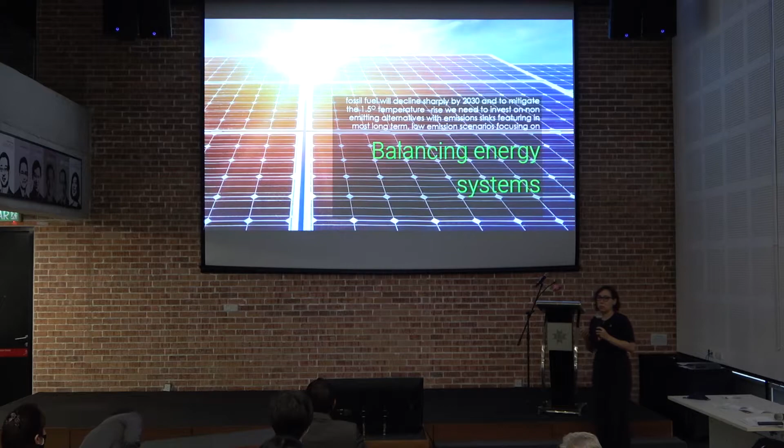Dubai Expo has this theme, and that is connecting minds and creating the future through opportunity, mobility, and sustainability. That was the theme given for the Dubai Expo in 2019 when we participated in the competition. Malaysia Pavilion theme statement from MGTC, from the government, was energizing today, tomorrow, harmony and business. And our theme was to connect all that through the synergy with nature, to connect the Expo's theme as well as MGTC's theme to the pavilion concept of synergy with nature. And what you're seeing is the exact presentation we presented when we gave the ideas for the theme.

One is balancing our energy systems, where we saw the future is about balancing our energy systems. It's about addressing this issue that Malaysia was always being criticized for, which is the deforestation, and that we actually are doing restoration for our forests. And we also have a cap to the minimum amount of forest that we are maintaining. It's about balancing sustainable plantation. We had a lot of criticism at the time we were doing the competition about palm plantation. And so the building had to talk about sustainable plantation, which you will see in the themes inside the exhibition.

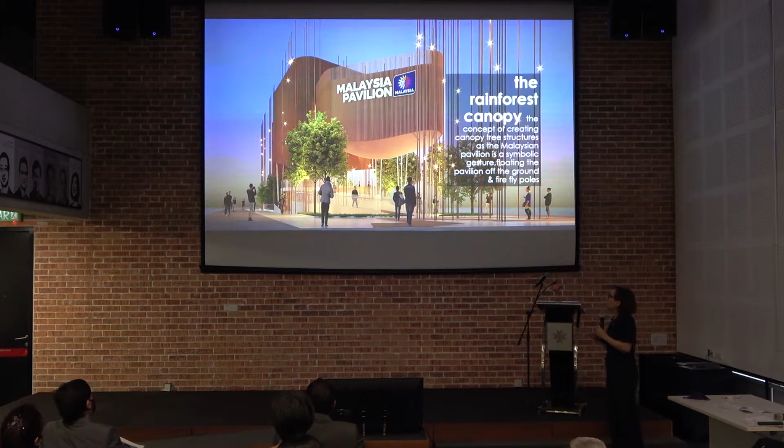And the concept of touching the ground lightly was taking something of our Malaysian tradition of building on stilts and building with timber. So this was the concept that drove our design. And the idea of being something a bit more playful, in the canopy of trees, this idea that you're doing exploration as you're walking through and jumping from one canopy to the other, was also something that we thought would bring delight to the experience in the building. And this was the idea for the rainforest canopy, that we elevate the entire building.

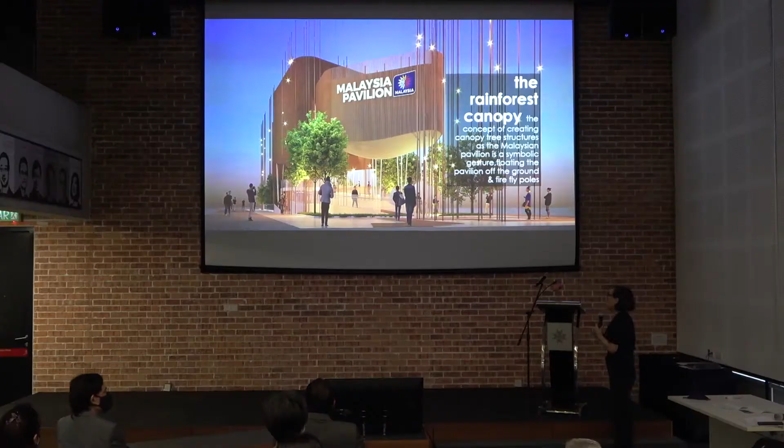Touching the ground lightly was not just that we lifted it off the ground, but the impact of this building, which then became the first net zero carbon building for the entire Expo. Despite being the smallest pavilion, it had the loudest voice to speak about approaching net zero, which has become a real theme for these last 2 years in the pandemic; almost every talk that you attend is talking about net zero. Everyone's talking about sustainable nature-based design, but we were already talking about it, and we wanted Malaysia to represent that and become an inspiration for Malaysia, but also globally.

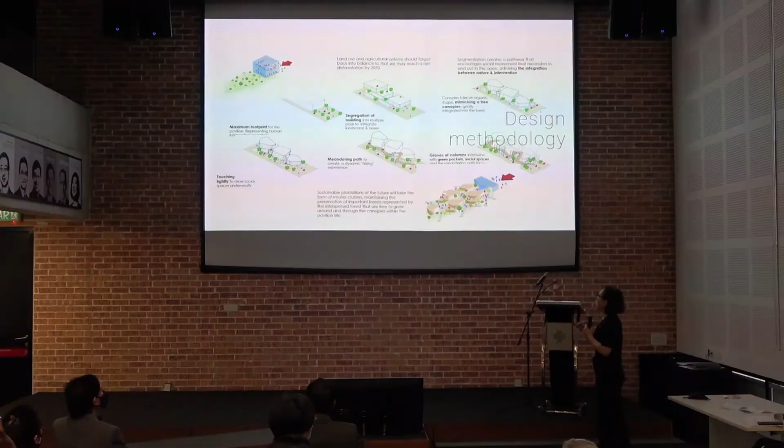In terms of the design methodology, usually what you see in exhibition buildings is one contained building and the experience of the black box going inside that exhibition. We wanted to change that. We talked about stacking, we talked about landscape, we talked about mimicking a tree canopy. And so you can see the evolution of how the design started to take its place in the formation of the building itself. And in the end, what you see is something that's fairly organic, with as many trees as can be covered in between it.

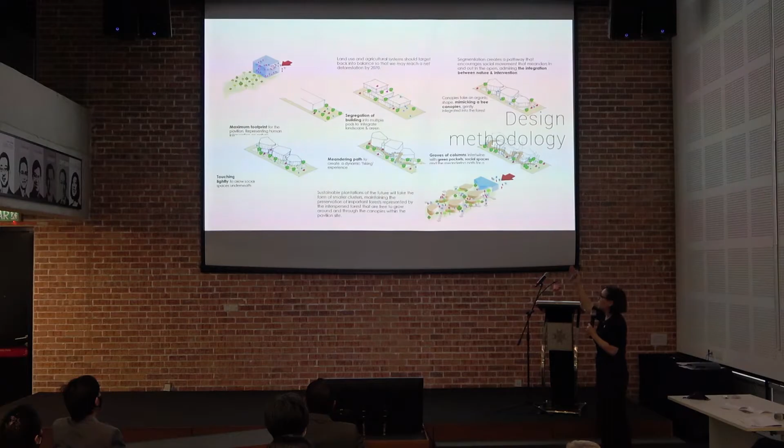But you see this meandering experience to get up there. There's always this huge line to get into Expo, and we wanted that entire experience to be part of the experience of going into the building. And this idea of a meandering river path to experience going into the pavilion is that you're meandering up the ramp and into the building itself as part of the experience.

So in terms of a spatial flow, we had to consider exhibition flow. It's incredible when you're doing one of these expos because the brief that comes to you from Expo is about this thick. It covers every element of sustainability. I think this is the first Expo that required that every pavilion had to report about the sustainability of their buildings.

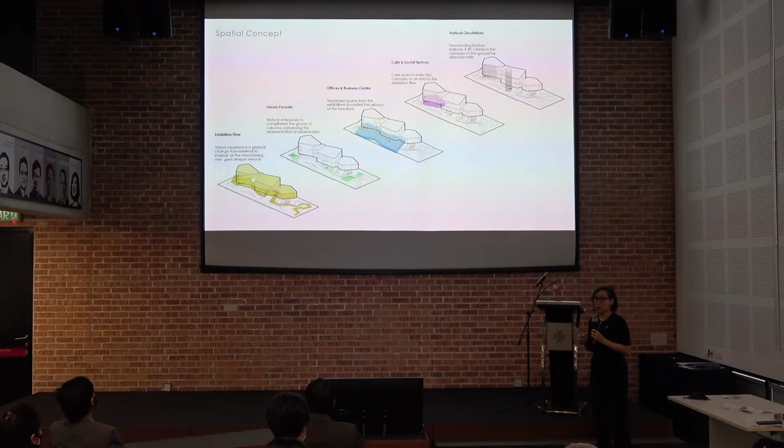This is the meandering experience that you go up. Right at the front there, we have a water collection pond, a biofield right in front, and then you enter and you ramp up and experience through what you often see when you go into the Instagram of the Expo. Malaysia is that they use this amphitheater, which is open to the public. So they have a lot of shows.

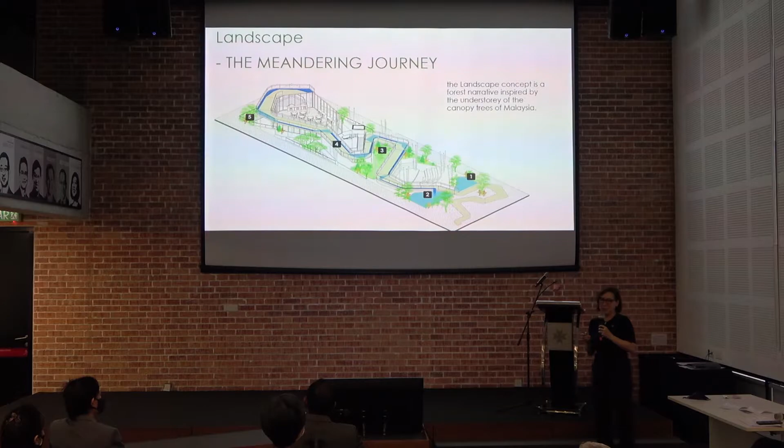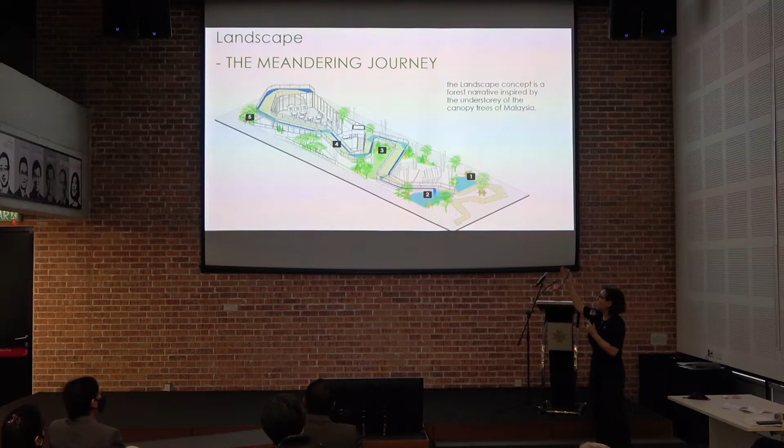Currently, they have about 820,000 people that have come to this tiny little pavilion itself. And they're aiming and they hope that they will reach 1 million by the end of March, which is incredible when you see the small exhibition spaces that you actually have to go into the space itself. So you'll meander through a garden, water feature, amphitheater, and all the way up past the cafeteria and public space and enter really from the rear of the building.

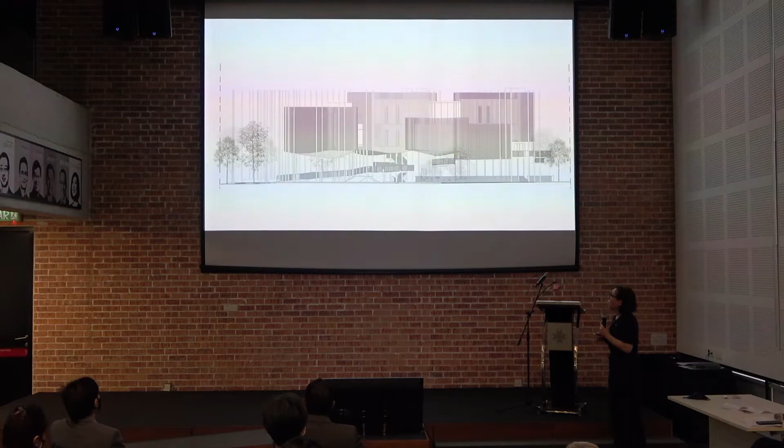The idea of using timber was also to do with carbon, and we'll talk a little bit about that later on. But as you can see, we just wanted to give something that was very, very light. Meranti timber is what we use for the timber, PEFC rated, of course, and that was the only element we brought from Malaysia. Everything else we actually built in Dubai itself.

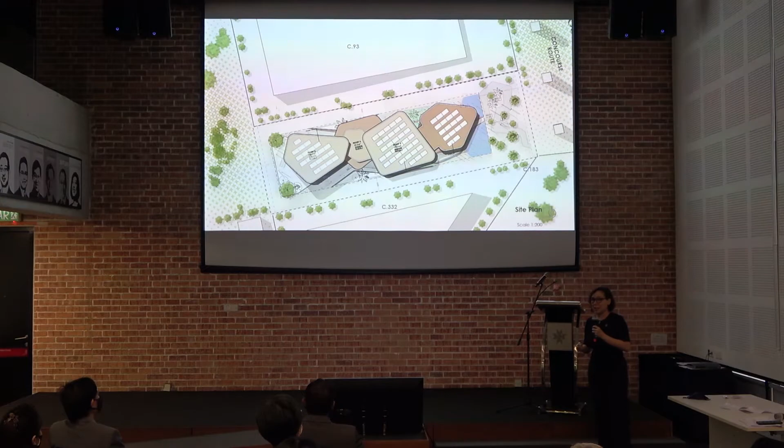This is the tiny site. It's very, very long. So trying to create an experience from the journey, from the time you enter and the journey into the whole experience is rather important. We had hoped that we actually, and we've told MGTC the next time that you get a site, please try and make sure you got a much bigger frontage. But a very narrow site is an interesting thing about how do you create an impact when you enter into the pavilion. This was our first perspective, and then you'll see what the finish actually looks like.

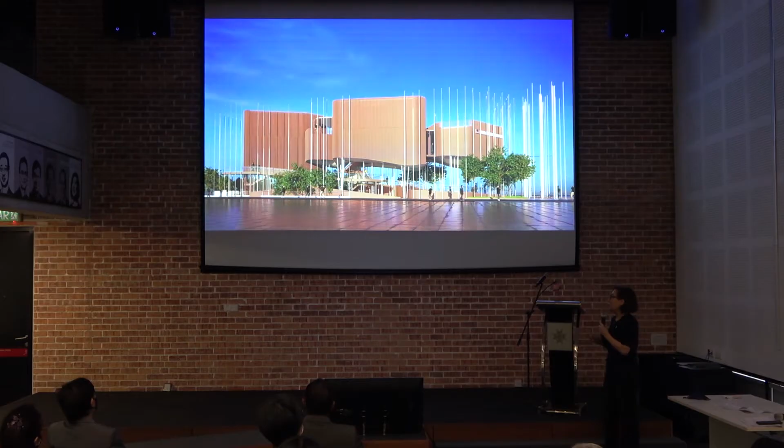It looks quite close to what this building looks like here, and you'll understand the story about why we inserted these metal columns. I think after we finished and we saw the Sweden, we'd never seen the Sweden design at the time we designed this, but when we actually went to Expo and saw their timber, we half wish we put timber here. So the walkthrough experience is just as important as the building on the first impact that you see. And so you see some of the images of what was our inspiration, and then you see some of the exhibition down below.

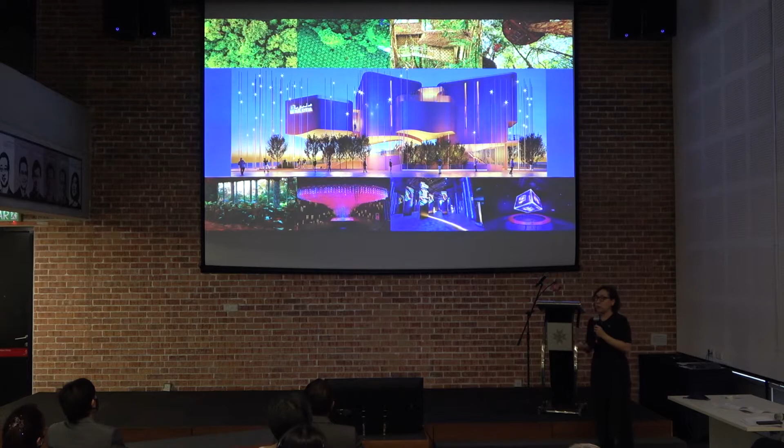When doing the visitor flow for this, as you can see, we suspended the building, or what appears to be suspended at the top, but we still also have a basement in the building, and we bring daylight in through the courtyards on the sides to bring daylight into that space. And that's because even though it was a small site, the client actually required so much that they wanted to do here. They run activities every week. They run engagement, they run business to business, they bring all the ministries. And so it really is very, very eventful. I think even more so than Milan was.

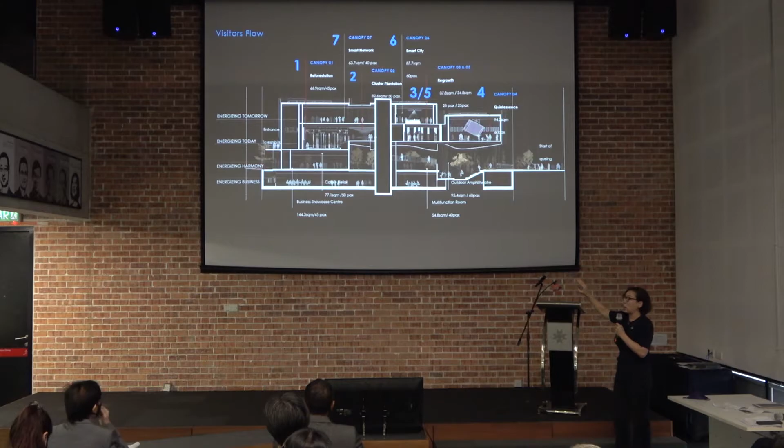So all the exhibition is at the top, and the theming that you can see here at the top there is Energizing Tomorrow, which is at the topmost floor, Energizing Today, which is all about where we are, Energizing Harmony is all about the public interface, and Energizing Business is down below.

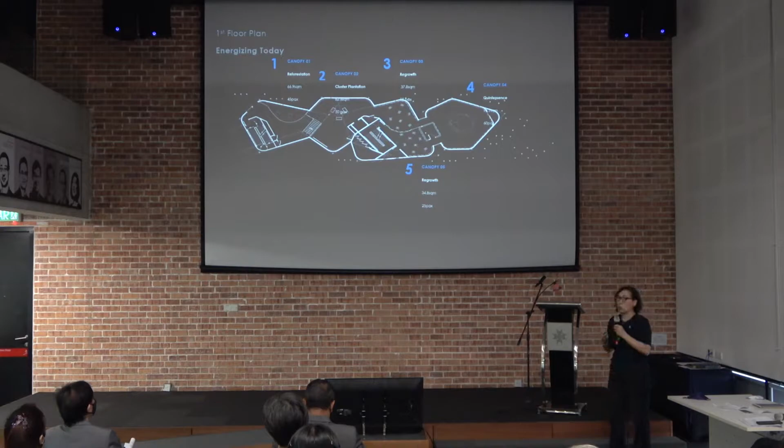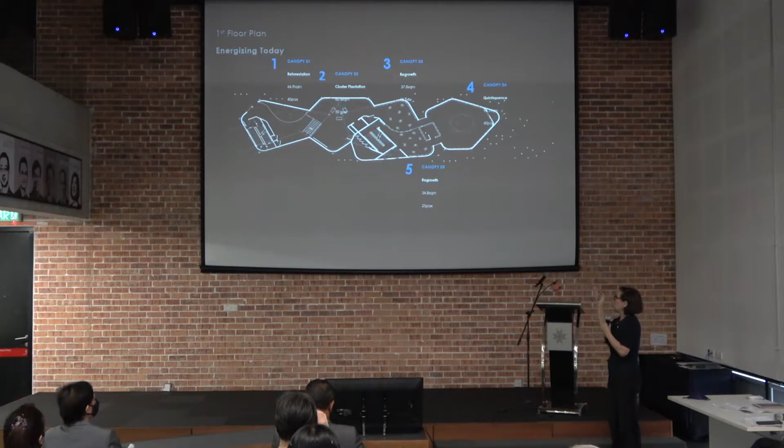In terms of plan, it's a very, very organic plan. On entering, we called it Canopy 1, Canopy 2, Canopy 3, Canopy 4, and they tell a narrative about each aspect about Malaysia. One is about reforestation, one is about cluster plantation, one is about regrowth. At the end, you'll see there's a cube there that's about quintessence. All the concepts for the interior and the concept for the exhibition was also generated by ourselves before we actually got an ID to work with us. In fact, we completed everything ourselves with regards to the story.

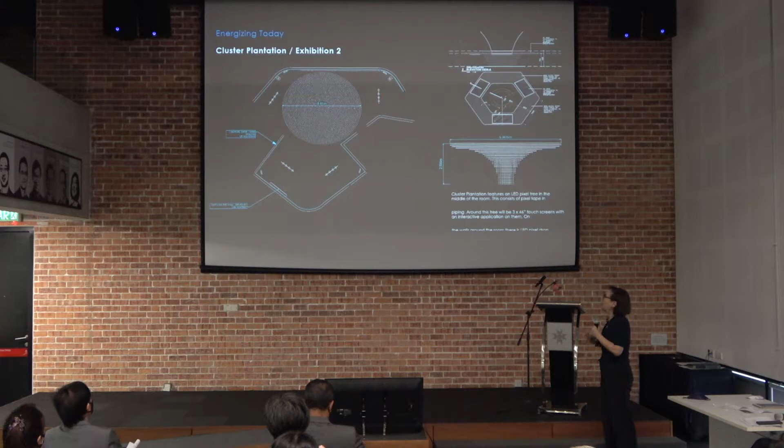The second was about cluster plantation, and it looks a little bit more high tech, and we didn't want to do the sort of typical exhibition about plantations and how much planting and all the rest of it. It really is a sort of an LED tree in that way, and cluster plantation, and this is the exhibition in that space itself, which is a sort of moving exhibition with the descriptions down below happening. So this is the experience that you get going there. So I tried to put in some visuals.

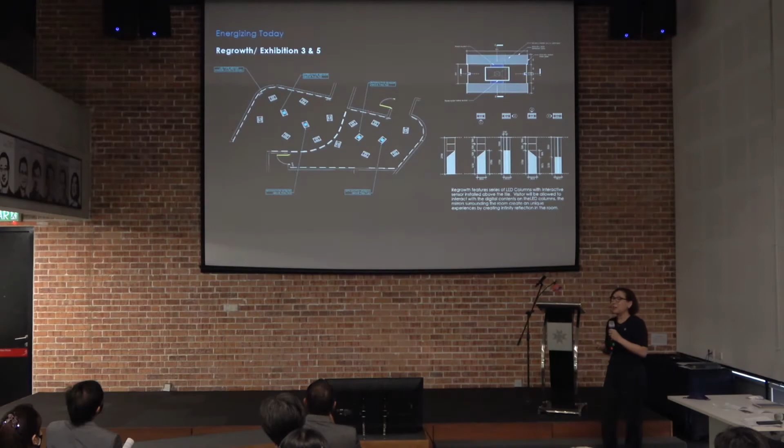These are from Chun, who is the project architect. She's here, so thank you very much for coming. You've seen this quite a few times, but these are all images that we have all taken as we walked through, just to see that what we designed and what we completed was exactly the same.

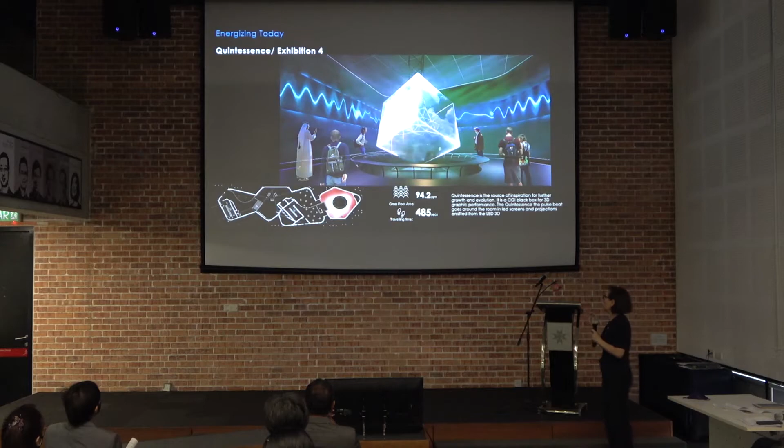This is a story about regrowth. And in regrowth, as you can see, it's about the future, what Malaysia is planning. And this is the space itself going through there. And at the end of that layer of exhibition on the first floor, we call this the Quintessence Exhibition, which is actually sponsored by Petronas. I know there may be comments about Petronas and oil and sustainability, but the story here is of Petronas actually making the right moves towards sustainability. This is the experience inside the exhibition, and we'll just play a little bit here just to show you.

It's a circular space with an LED cube inside there, and there's a narration for about 5 short minutes whilst you walk around, telling you the experience inside. One of the best things about going to Expo is going in to see all the other exhibitions and all the other pavilions. It is quite incredible. Everything from the Foster's mobility to the opportunity on the other side is just quite an amazing experience.

Next. Oops, back, sorry. But the experience of creating a pavilion is also about the experience of the outside. And so in that journey and at nighttime, the poles themselves are a symbol of trees, actually. That's the idea of the poles on the outside. If you were to take that away, it would feel quite empty. It's also to frame the building. But on these light poles, we have little LED lights that are representing the fireflies.

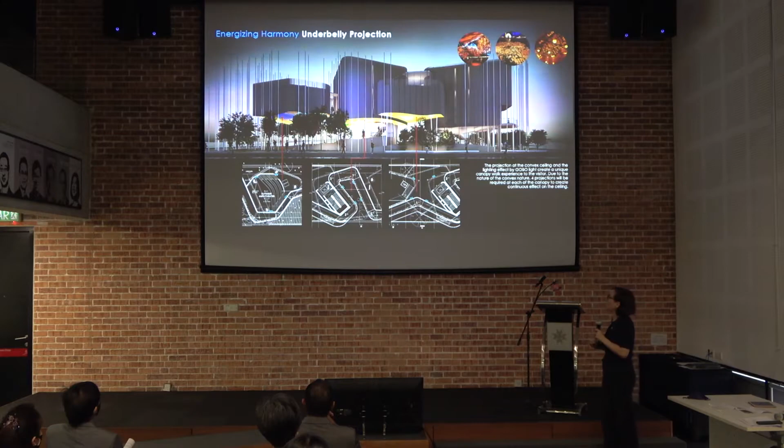We presented this to the then Minister for Energy, which was Yeo Bee Yin. And one of the first things that she wanted to see was this idea of the firefly. And we incorporated this idea of the firefly when we presented to her. But on the underbellies of the pavilion itself, we have these gobo projections that are actually exhibiting and lighting at night. So it's fairly dynamic. You see some sort of green verticals, columns going up there inside, and that's the view at night of the pavilion. That's the views of the lights around.

And actually we are right at the end of one of the streets of the Expo, unlike Milan, where we were in the middle, where you start from one end and you finish on the other end. In this case, there are 3 branches representing opportunity, mobility, the themes of Expo. And we were at the end of one of the subsections. So the poles actually help us to be seen from a distance, which was actually quite a help.

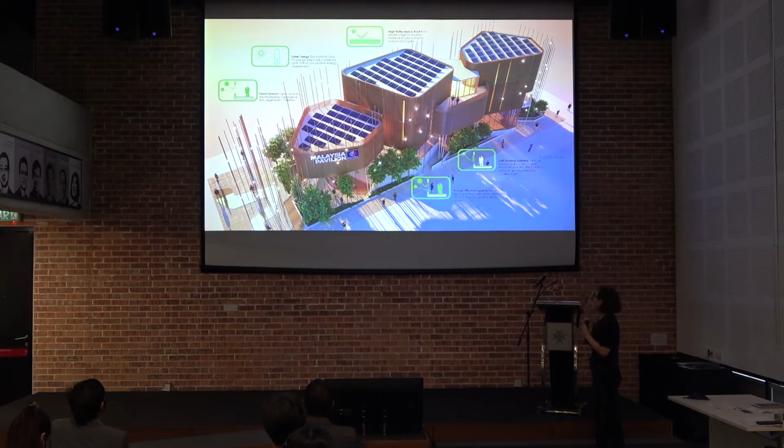And of course, in the building, we actually put solar PV as much as possible on the roof. We have HVLS fans on 2 sides to actually have air movement going around the building. It is obviously self-shading in the areas down below. So there were various things you can do right at the onset when you're designing the building.

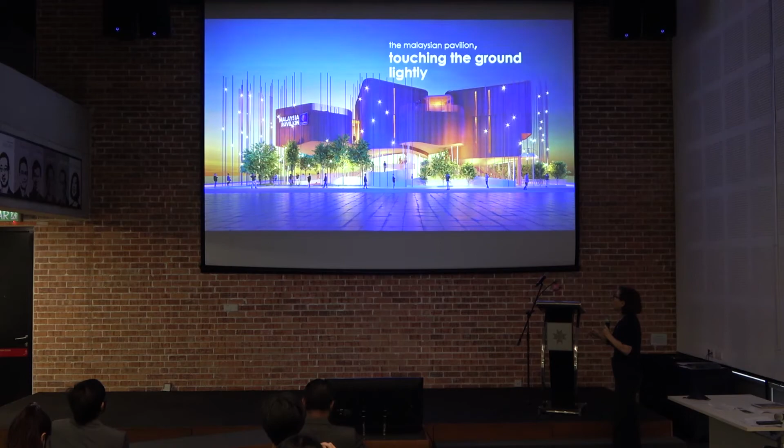This is one of the final renders, and these are some of the perspective views of the building itself. So I hope the concept and the end product match. And in this case, the building itself, we started to talk about the tonnage of materials used for every sector. So we actually did an embodied carbon calculation at the beginning and submitted that as our sustainable report to Expo. At the end, which will be next month, we will be looking at the final operational.

Now, the operational here, the highest value is the AV. We've just discovered that after doing all the calculations. Chun will tell you that the highest thing is actually the AV experience, because you're doing all that. Now, not all pavilions give you that whole AV experience. There are some that just give a more natural feel as you're going through, but most of them come with the animation and all the rest that you see.

So what did we do for the embodied carbon? We use lightweight structure. All the floors here are not concrete floors. All the floors here are marine ply floors. So everything is in timber.

Thank you, Sika. We have that on our roof. It's the only thing that we want to prescribe for roofs for waterproofing. So just to let you know, that's just a coincidence. You have not sponsored, we have paid for it, but it's on the roof here, Sika Sarnafil.

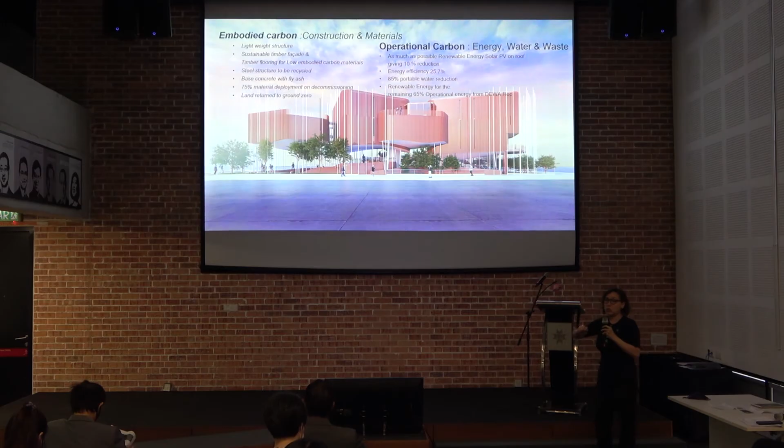At the moment, the Malaysian government is talking about a legacy program. Expo has picked this pavilion as one of the pavilions to be the legacy, which means it can stand for another 5 years, which is one of the first times, which is a wonderful thing. But we haven't got confirmation just yet whether we will be taking the legacy or not.

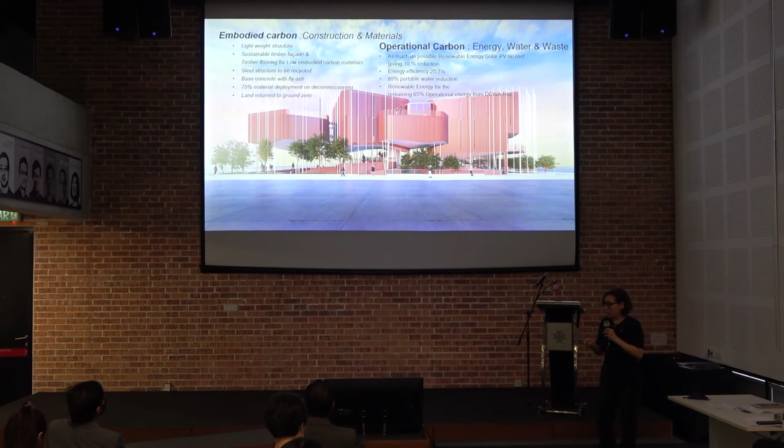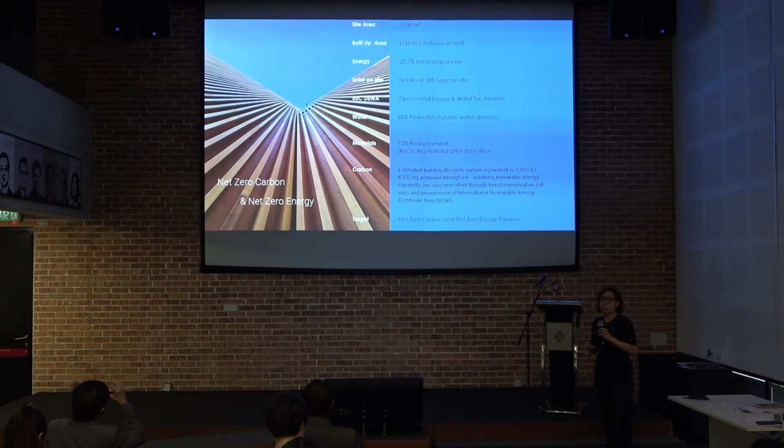10% in terms of PV on our roof was already given. We didn't know we were going to get free REC from DEWA. Energy efficiency already dropped to 25.7. Potable water in the desert is not a very easy thing to do. And certainly the amount of planting both Singapore and Malaysia had done is quite a feat, looking at the potable water reduction. And then, of course, the renewable energy that we spoke about. Being the first net zero carbon has been a great windfall for Malaysia, representing that this is the direction to go.

And what does that equate to? And the tonnages, we actually had to work all those out. We will obviously be re-looking at the operational energy, but Malaysia has already purchased tree planting, specifically in return for some of the tonnages of GHG that we are emitting. And we actually have bought even more. Just as a ratio for you to build, solar energy can only cover a 1:2 proportion of your roof coverage to your floor area, and it's only covering your day use. So if you wanted to get to zero, net zero or neutrality, it's really quite tough.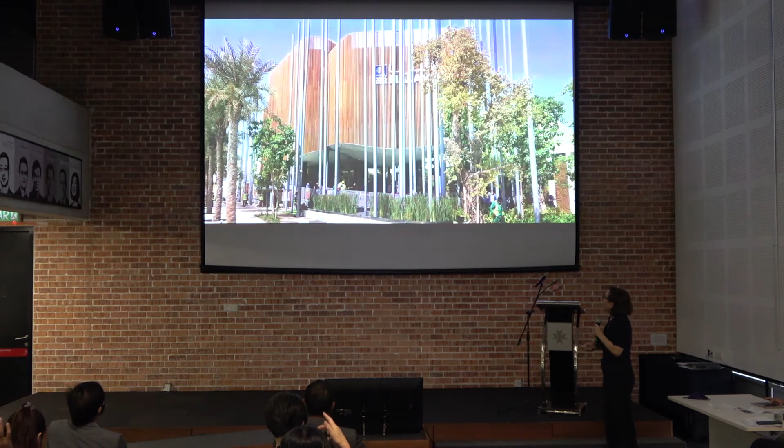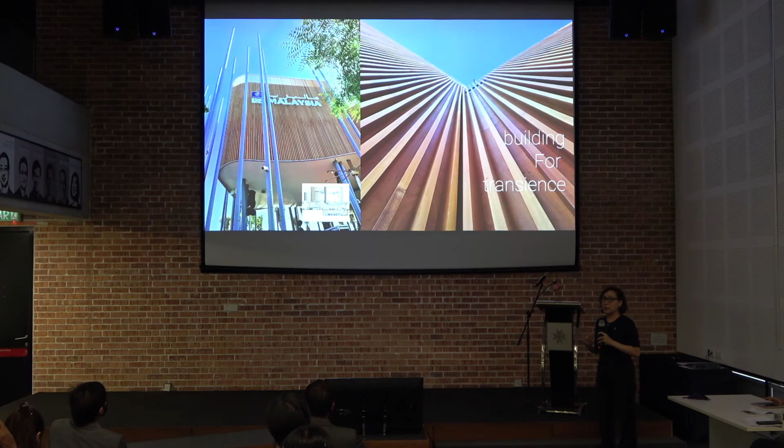This is the first picture. There's Chun on the right there. There's our client in the middle. This was the first time we put all the scaffolding up. When the land is given by the government, so when you go to Osaka, good luck to everybody else who's going to be entering that competition, you have to return the ground to exactly the way you found it.

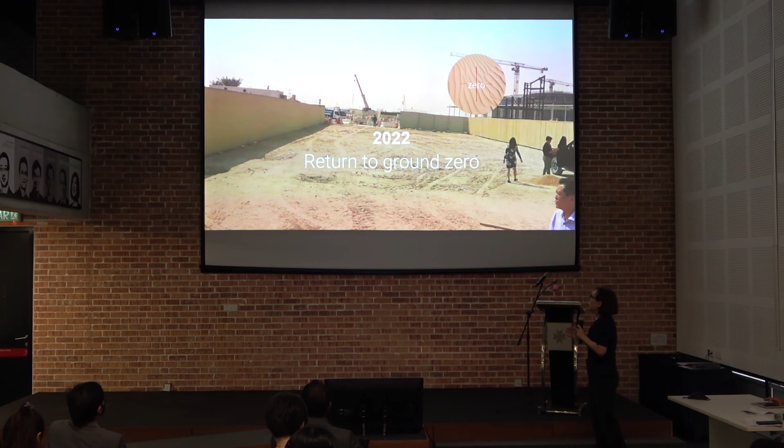The wonderful thing about the Expo site, before everybody talks about the waste and all the rest of it, is quite a lot of the pavilions are being purchased, but also the site has a legacy program, and they're actually turning it to residential as soon as this is completed. Residential, institutional, a park, and all the rest of it. So that planning was already done years ago and will come into fruition after Expo goes down.